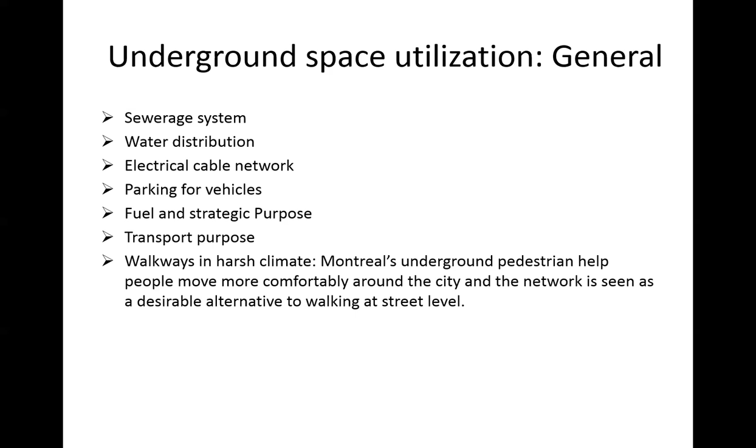There is also the developed countries, like Canada specifically, the Montreal underground pedestrian system where the climate is very harsh. So people also use this underground space for general walking purpose, like going from one street to another, because if we have the money, we can afford to utilize this underground space for walking purpose also.

These are just typical examples, like this is the sewerage. In Mumbai especially, we have a very strong network of sewerage because of the Arabian Sea, and here the depth of the sewerage goes more than 20-meter depth. All the channels are linked and very well maintained by the BMC, and I can say Mumbai is having the best networking system in terms of sewerage.

This is the water distribution system that is also being utilized underground. Once it will be running successfully, all this space will again be utilized as a surface for transport purpose, or any other development. Effectively this much space is utilized if you go underneath.

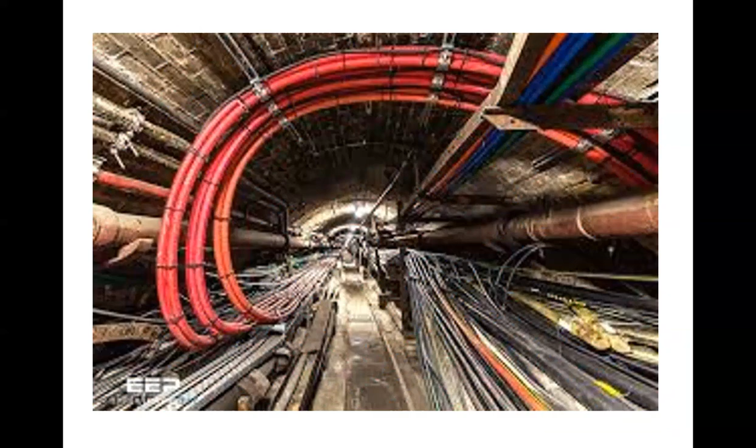This is the electrical distribution system underground. It's a very huge distribution system. I have also seen in Delhi while working on the domestic airport development, station development - there is a huge system of AC and all those underground cables that directly go to various terminals like T1A, T1C, T1D. This is a very huge network running all along the airport terminal and all along the roads covering it. So effectively, while doing this underground networking and cable arrangement, that much space is being effectively utilized as underground space.

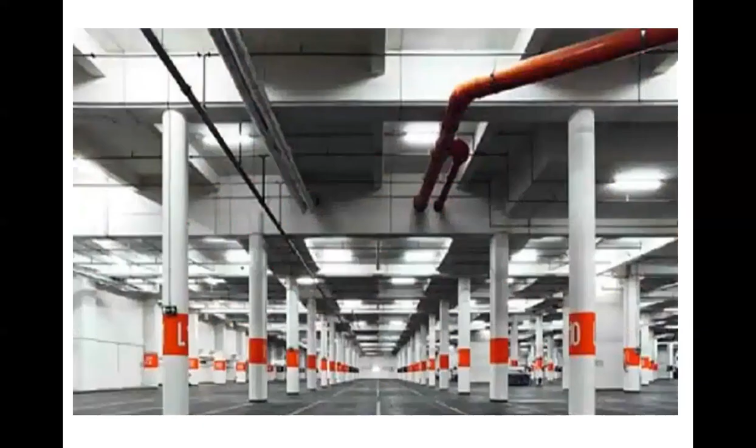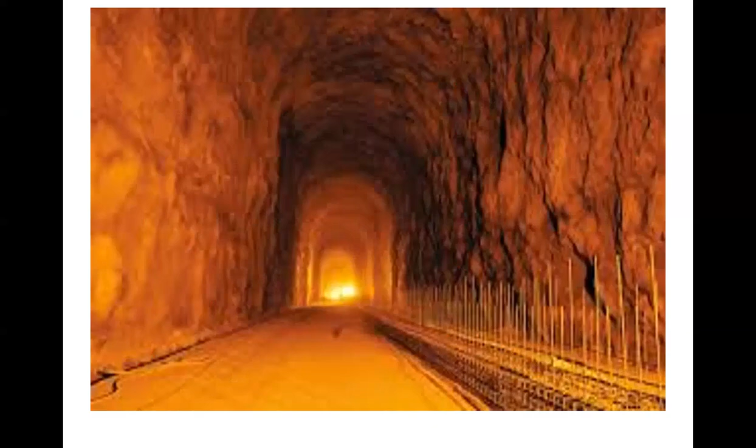Again, in Mumbai, we have a very good system of underground parking. It is there in Delhi also, in major metro cities, and especially in developed countries we have G+20, G+24 type underground parking space utilization available. As we know, in metro cities the number of four-wheelers is increasing like anything, so to overcome the problem of parking and space constraint at the surface level, we can utilize the underground space to develop parking, and effectively we can also manage traffic control. So this is again the utilization of underground space, like this fuel storage underground tunnel.

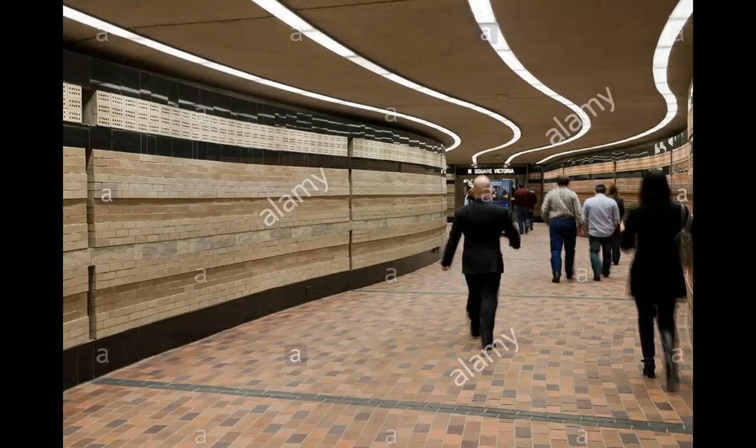This is the example I quoted - the Montreal street where people can walk in harsh climate, since it's mostly very harsh there. So people use this, and one study also found that there is a decrease in the crime rate when people go through this street, because it's enclosed and safety can be guaranteed. So that is also one aspect in a developed country where safety is a major concern.

Now back to our specific MRTS underground space utilization project. Why do we need MRTS project at all? We need our metro system because it will give us mobility, safety, and traffic congestion reduction. I think all of us know it's a very proud moment for Delhi Metro when we received the first green carbon credit system - our metro was the first in the world to receive the carbon credit.

This carbon credit involved an independent analysis by a UN agency. Generally they do the analysis, and through their study they can conclude how much vehicular traffic has been reduced due to the service of metro. So we became the first metro in the world to receive this carbon credit. Those who visited Delhi in the late 90s or early 2000s know what the traffic condition was there, and now we have easy connectivity all along Delhi because of metro.

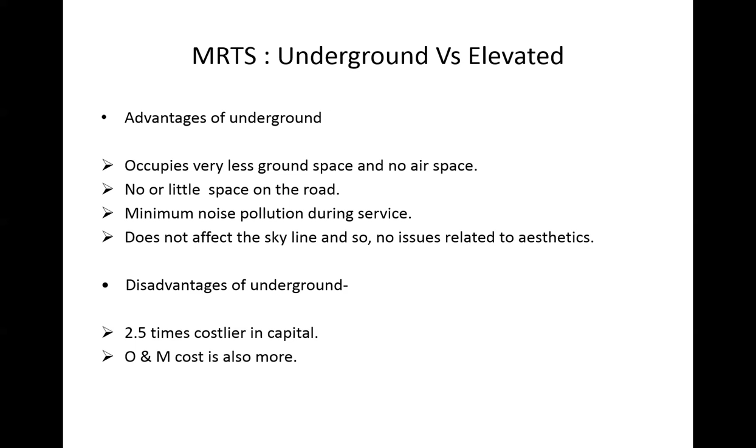The DPR is generally prepared with all stakeholders invited—meaning everyone who will be involved or affected by the project. Everyone is informed through newspapers, and a general consensus meeting is held, where the alignment finalized in the feasibility studies is further refined. There are some instances I want to share from my experience.

There are a few instances where a line or station that was earlier perceived to be elevated was, after this consensus process, converted into underground, and vice versa.

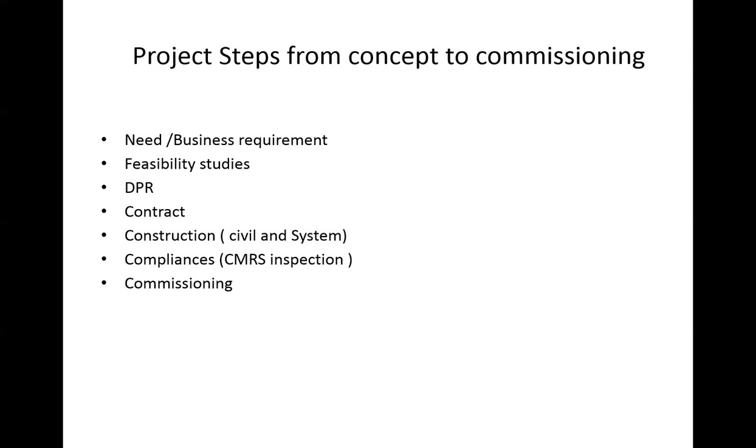So I have taken a bit of time to explain how the metro project covers, from concept to commissioning, what the steps are. Now this is specific to underground metro work.

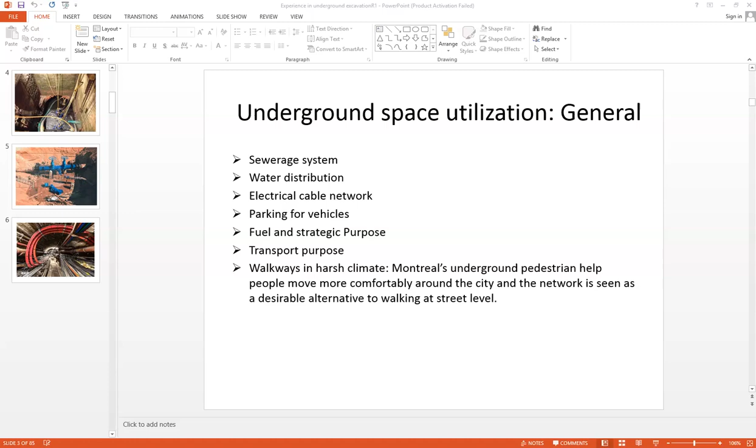Rehan, if I am going fast, please let me know. I will slow down my presentation if needed. It's fine, you are clear and very audible. Okay, if you want me to go slow, please remind me. So now we are at our main topic of today's session, underground metro work.

So again, when we go for construction, we have certain things to finalize, like our general arrangement drawing, the alignment drawing. This shows all our curves, all our elevations, the schedule of dimensions, like when our bogies and metros move, what clearances they have to fulfill, and what lateral and vertical clearances need to be finalized. This alignment finalization is done.

It's a very important part. We do this alignment finalization to minimize cost, minimize disturbance to the public, and maximize traffic count. Once the alignment is finalized, we are in a position to freeze our lines. All of us know there are various lines in Delhi Metro, line 1, line 2. So once the line and alignment are finalized, we can go for the next steps.

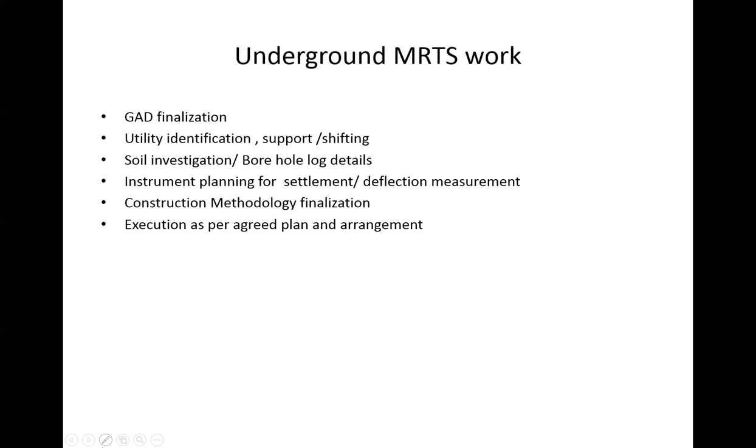Then once this methodology is finalized, execution will be done. So these are the steps. Now I will go in detail with individual steps.

It's a very rough sketch. Generally, the alignment is done in the AutoCAD drawing. Nowadays it's a BIM system. This is the area, you can see there is terminal 1, and these colorful lines are showing this alignment. So we have to see how to mark the alignment on the ground.

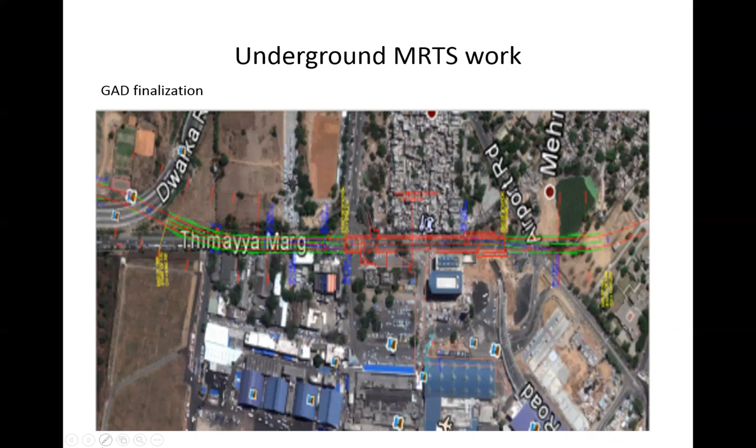This is a very preliminary drawing. We need to do a number of refinements on this drawing with the help of advanced technology, like we use the Bentley system to refine the curves and station location. The red color is showing the station location.

This is the area marked in yellow, that is the underground station. The IGI airport underground metro station is shown in yellow color, and you can see here this is T1C, T1D, T1A. This is the airport area, and all these are the offices and establishments which support the airport. I'm sharing my experience working with Delhi Metro, specific to that underground station in this domestic airport.

I have a combined utility drawing also, but that will not be properly readable here. So you can imagine if you can zoom it a bit - it is possible to zoom it further.

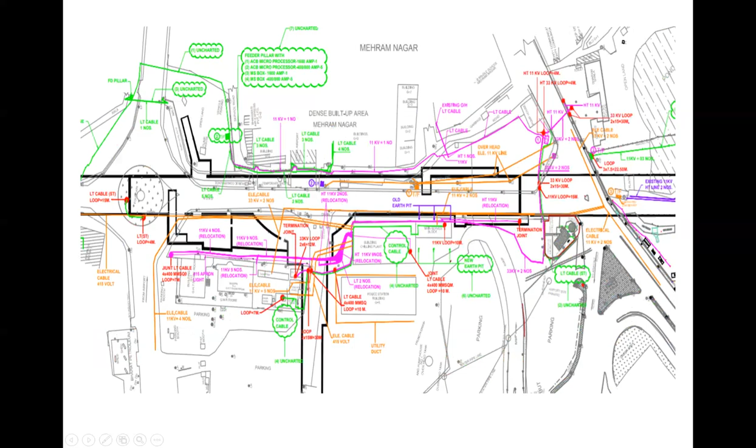This particular sheet, by control scroll - so you can see it, all these HT lines are there, LT cables, HT 11 kV, 33 kV. So along this network, cables are existing there, running somewhere along the upcoming stations and somewhere crossing the station.

As I have already told, we have to mark this on the ground, in collaboration with the DIAL team and the Airport Authority of India. We have also done the trenching, and as per specification we have laid all these cables, and we were able to save our construction zone with all this utility.

This is only the electrical cable that I am showing. Again, I am reminding, there are optical cables and a network of water pipelines also there. Okay, next please.

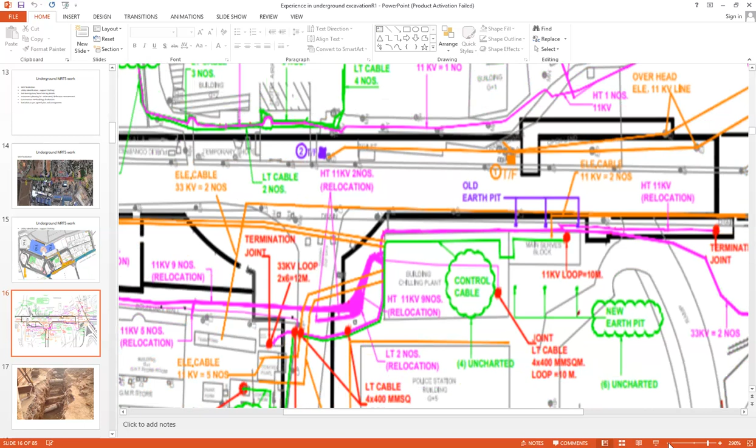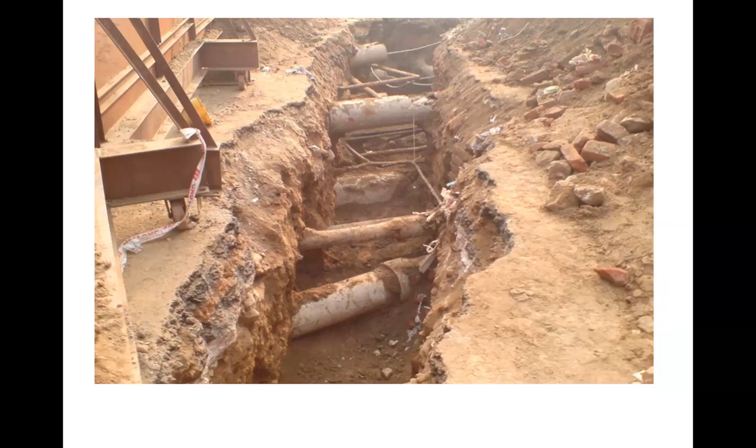This is the water pipelines, and this just highlights how difficult it is to work without shifting or without supporting these utilities. Okay, next please.

Next step, once we support or shift our utility, then generally it is presumed that by 2 to 2.5 meters we will get all the utilities. Generally we made our contract also like that, because the maximum depth a water pipeline can go is like 1.2 or 1.5 meters, but electrical, especially 33 kV cable, goes up to 2 meters.

But beyond that, we don't go in our preliminary stage, so we don't have much knowledge about the strata, because most of the area is filled up soil. So the top 1 meter or 1.5 meter, we can say, is not virgin soil or actual ground condition. So to further assess the geology or strata there, we go for soil investigation.

For that, there is some standard practice that we follow as per the IS codes. We go for the borehole, we calculate, we take the core samples, and after that we calculate their RQDs.

Once all this data comes to us, our design team will assess this data, and as per the RQD designation, the calculation and support structure, and the design of the slabs and walls will be done as per this data only.

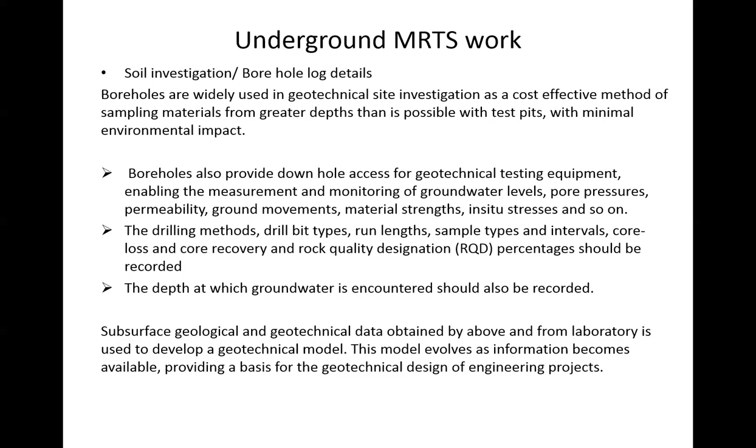So we take our time after the project starts, we do rigorous study and sample taking, and we appoint a third-party team also for conducting this test, so that we have actual data, and the result and design will be done as per that data. Okay, next please.

And at the time of construction, when we start, we must be sure of at least 90% of this data. The cost of this investigation, when we have 100% awareness, is approximately 3% of our civil Schedule A costs - when I say Schedule A, that means the station or tunneling cost. Okay, next please.

Once the construction will start, the design is finalized, and the drawing has come to us, then we will go for construction. Before the construction, as I have said, we will monitor the existing structure. We will do the background monitoring. Background monitoring is nothing but the monitoring before the actual construction starts. Then we will do the vigilance monitoring, during the construction period.

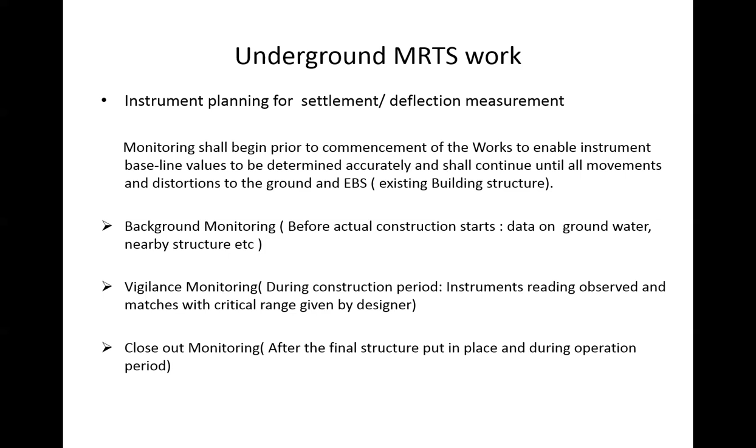And thereafter, this closeout monitoring - once we have finished the construction, then again, while the O&M operation is running, at least every 3 to 6 months, we need to again monitor those structures which were earlier sensitive.

This is like in the case of a tunnel. Generally, in Delhi Metro, we have a practice that we assume an active zone. Active zone means we do active monitoring around 50 meters from the tunnel axis, and for the vigilance zone, it is up to 100 meters from where the tunnel axis is going on.

Similarly, in case of stations, we again have this vigilance zone and active zone, as I briefed earlier. The distance is not a standard, it's nowhere written. It's our general practice from Phase 1 that we follow - up to 50 meters we do active instrumentation, and up to 100 meters we are vigilant, checking it, but the frequency is less.

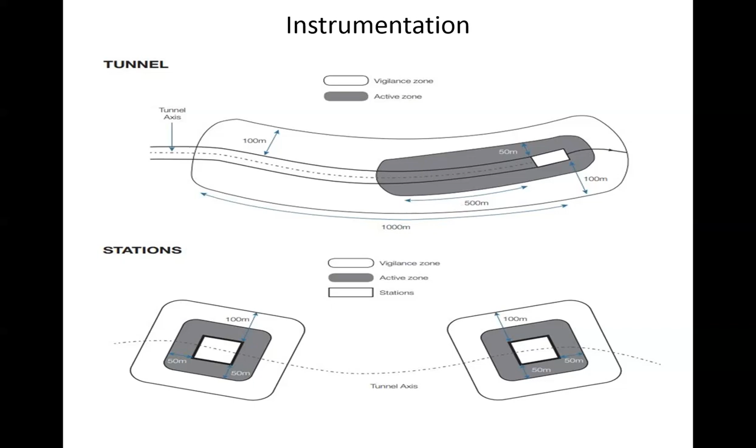These are some of the ways by which we can monitor our excavation. We have our tilt meter, we have our BSP - BSP means a building settlement point, road settlement point. We install these, and as per the frequency, we take the readings and compare with the threshold value.

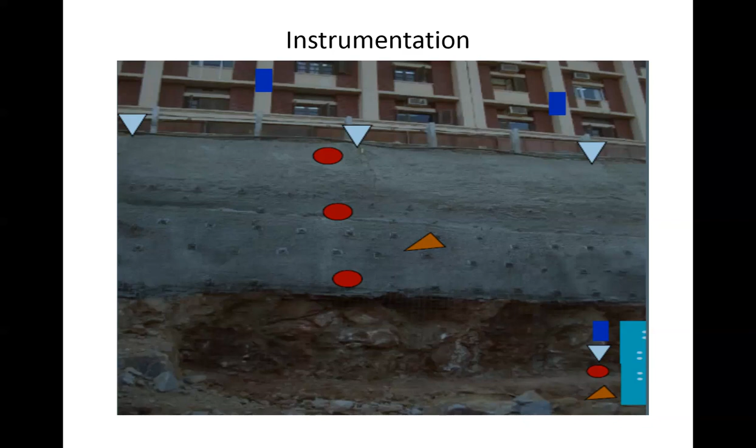These readings are important. Why is it important? You can see here - this is an existing building where there is already a crack. So we have installed a crack meter here, and we have taken the base reading. Before actual starting of the construction, this activity has to be done to take the base reading.

We also prepare a building survey. We also do the building survey, and whatever defects or cracks are available, we take the pictures along with the owner of the house, and we sign and also take the countersign so that it will be a proper record, and it will serve as a base reading while we are going for construction. So it will be very useful at a later stage.

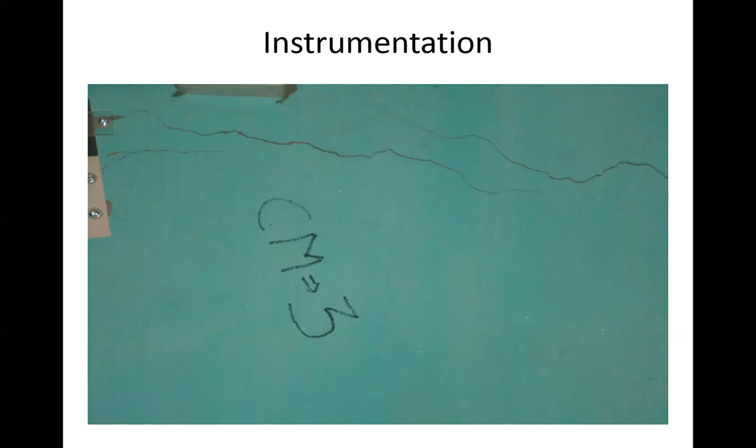Now, all this initial reading, once we are done with, we finalize how to proceed. Even in construction, we have a number of methodologies available with us, like cut and cover, drill and blast - drill and blast is one of the oldest techniques for tunneling - tunnel boring machine, NATM, it's very famous.

In fact, NATM is also being used in the Delhi Metro, especially for crossovers, like passing from one cross passage to another tunnel. While making the way between these two tunnels, generally this will be made at approximately 244 meter intervals. It is a guideline, so there we use the NATM method.

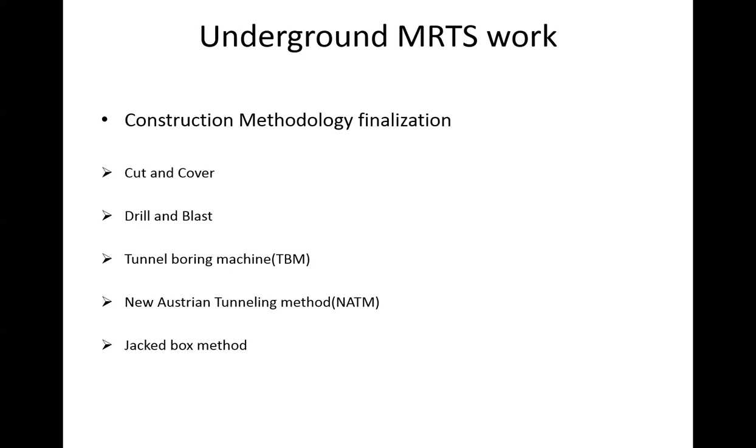And this box - jacked box - it is also called box pushing method. So these are the methods that are generally used in Delhi Metro. There are some other methods also, but these are the ones being used in Delhi Metro.

Now, to decide and finalize which system we are going to choose, there are some general criteria - like if we have hard rock, then we will go with shield tunneling, and if it is soil, then we will go with the cut and cover method. It also depends upon the cross section and the continuity of the tunnel.

Like if you have only a 100 meter or 200 meter tunnel, we will not go with TBM, because it will be very uneconomical - since to lower the TBM we have to make a shaft, and to take out the TBM we have to again make a shaft.

One is called launching shaft, from where TBM is launched, and from where it is taken out, that is called retrieving shaft. So preparation of shaft is itself a huge task that is highly cost intensive and labor intensive. So the choice depends upon the continuity and the cross section, and also if we have a curved tunnel, then TBM machine is not so useful there.

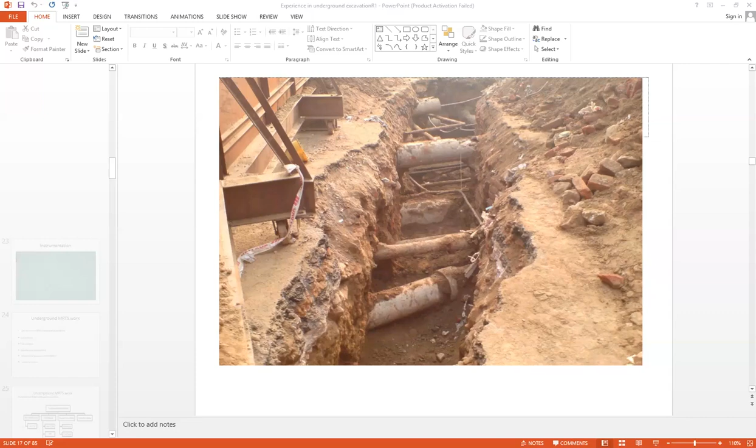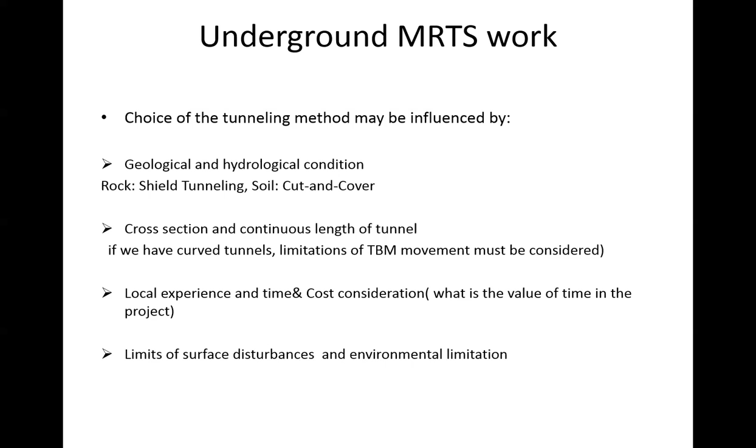It also depends upon the cost consideration and how much time is available. If we don't have much time, then we can go for the TBM because it gives us fast results, but there will be cost involved. And of course, there's the limit of surface disturbance and environmental limitation - with cut and cover we have a lot of surface disturbance, but with TBM we can easily pass beneath the ground, and nobody will even be aware that the tunnel is going on. So it also depends upon how much disturbance is allowed in that area.

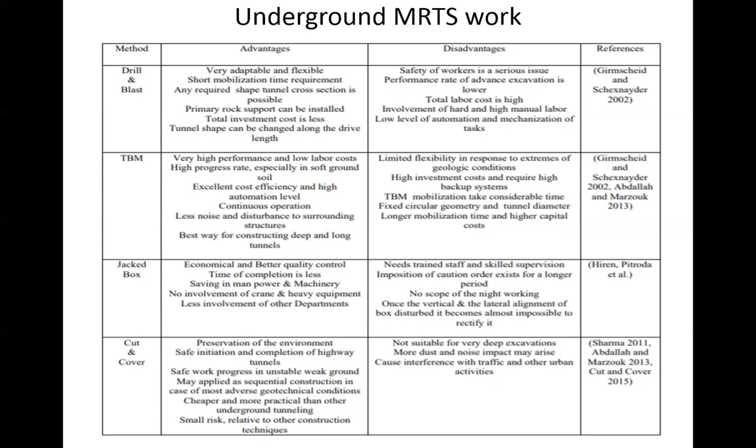Okay, next please. This table is for reference purpose, it gives us some advantages and disadvantages of different methods - drill and blast, TBM. I have already briefed where we will go for cut and cover and where we will go for TBM. So this is just for reference. There are always some advantages and some disadvantages with specific methods.

Now let's confine ourselves only to the cut and cover method, because TBM is going to be presented tomorrow. So I will restrict myself to the cut and cover method only.

Again, in cut and cover, there are 3 or 4 methods available with us, like the D-wall method, also called diaphragm wall. There is also secant piles and sheet piles - soldier piles also used in tandem with horizontal planks, also called wooden battens.

In detail we will study in the next lectures where this D-wall will be used and where these piles are used. Basically D-wall is used when we don't have any problem with groundwater, and up to about 20 to 25 meters depth we can go with D-walls.

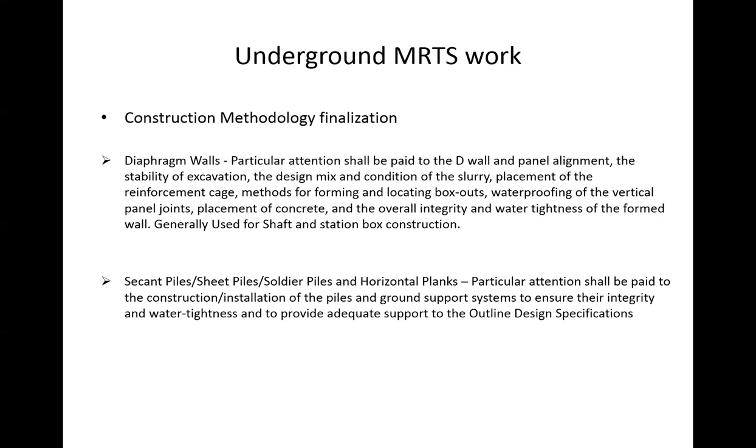With D-walls we have minimal traffic disturbance and minimum surface area disturbance. With sheet piles and secant piles, also known as the bottom-up method, we will have maximum surface disturbance, and its use is restricted as compared to D-wall.

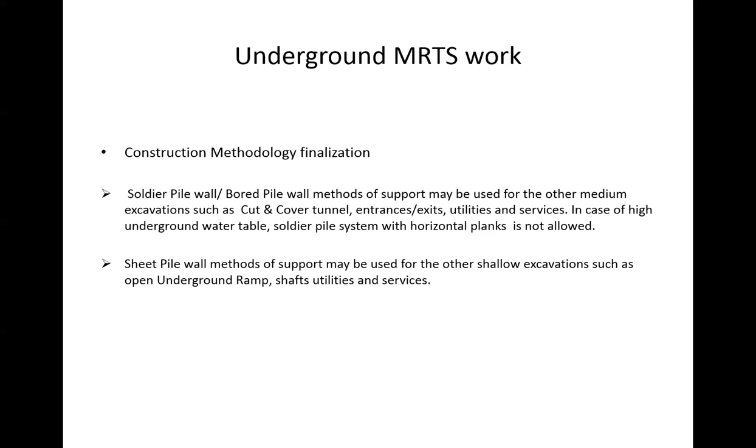Sheet piles are specifically used in the case of ramps. What is a ramp in a metro MRTS project? If you have visited an underground metro station, when we come from underground to the elevated section, there will be a ramp. So in the ramp area, 90% of the excavation we will do with the help of the sheet piling method.

What we do is put up these piles, or sheet piles, in association with planks as per the design data all along the station box or cut and cover box, and then we start excavation of the strata, and we go up to the desired level, up to the level where our track is going to come, where the metro structure is going to come - the lowest metro structure, platform level or track level, you can say. But in top-down, what is happening?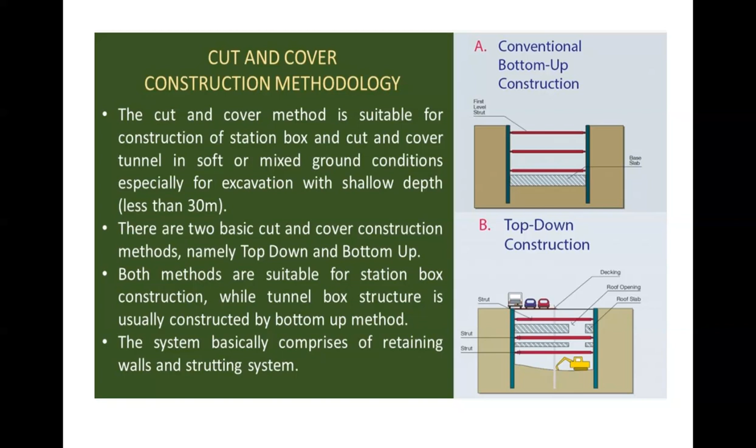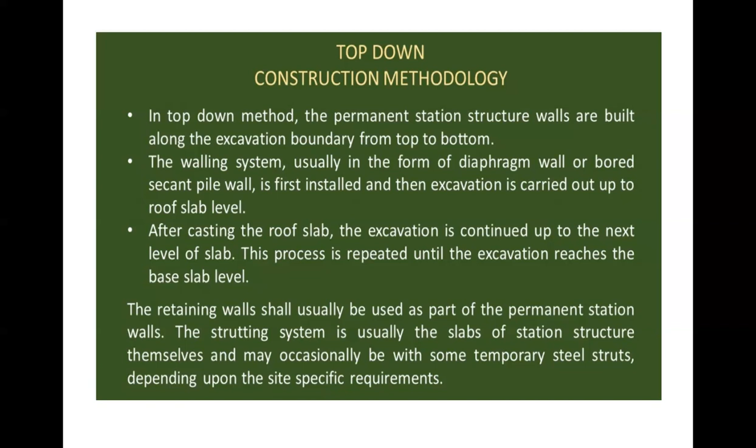Okay, next please. This methodology I have already explained - it's like a retaining wall. Okay, next please.

So these are the steps of top-down construction methodology that I just explained. In step 1, we put up the retaining wall in terms of either diaphragm wall or soldier piles. The purpose is to retain the wall, and in case of D-wall, it will also serve as the station wall. The concrete grade used will be the same as the design wall concrete, giving the same strength, so we can utilize it as a station wall with proper jointing treatment.

Once we install the retaining wall, in step 2 we can do the top roof up to the roof slab. We do the excavation and put a strut there, and from this there is a cutout. In step 3, you can see one cutout below the strut, from which we can lower our equipment and start construction activity while traffic movement can be restored. As you can see in figure 3, traffic movement has been restored - not exactly to its original location, but it gives some relief to the common public.

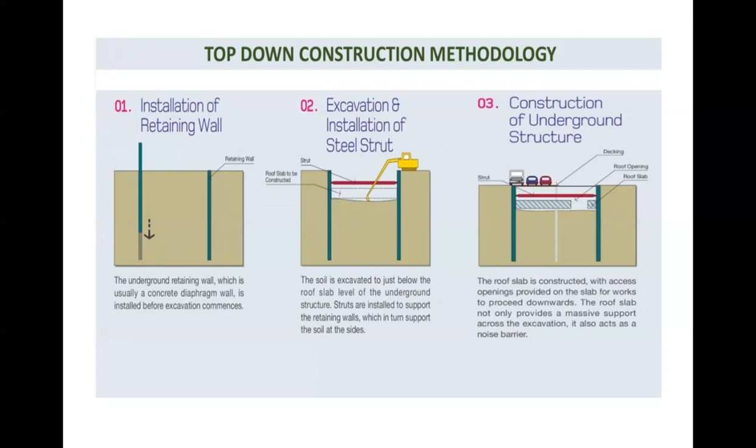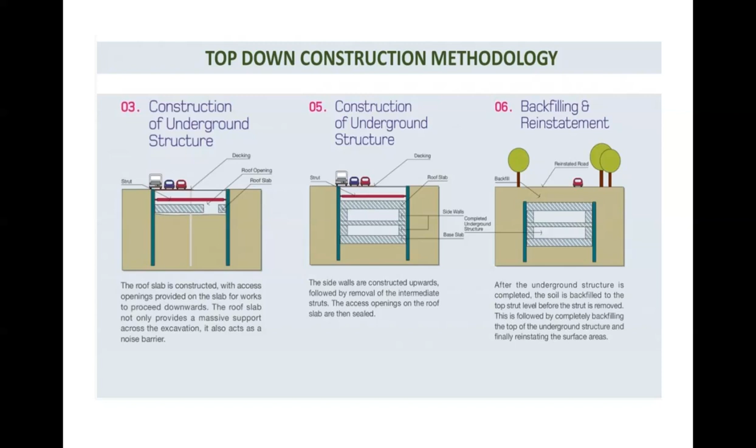Next. As we can see from step 5, we are going inside, and this white hatch mark shows the slabs we are also constructing, through the help of the shafts or cutout. Once all the lower slabs have been cast, we come up - whatever shaft or cutout is left in the concourse slab (the second middle slab) will again be filled, and the roof slab will be filled. In step 6, construction will be complete and restored to its original position. So this is the methodology used in top-down, from step 1 to step 6. Okay, next please.

Now in bottom-up construction methodology, as I already told, it is the same as putting up the retaining wall in terms of soldier piles, and these soldier piles and D-walls will be designed with respect to the earth pressure there. As we have collected data up to this stage, our designer, with the help of investigation data, comes up with the design of the soldier piles - their section, size, depth - and accordingly we fabricate those soldier piles and install them at the site.

So in bottom-up, once we put this up, thereafter we start construction all along the prescribed area, and here we have certain limitations. In top-down method, we are able to restore traffic at least up to 1 or 2 lanes while constructing the roof slab, but here it is not possible because it is all excavated along the length. Okay, next.

Though sometimes, once or twice, we have provided a steel deck, but that was a very costly arrangement, and it's only done once we reach at least 50% or 60% of the desired depth - then we can provide the steel decking system. So these are the steps of the bottom-up construction methodology, similar to, just opposite of, what we did in the top-down method.

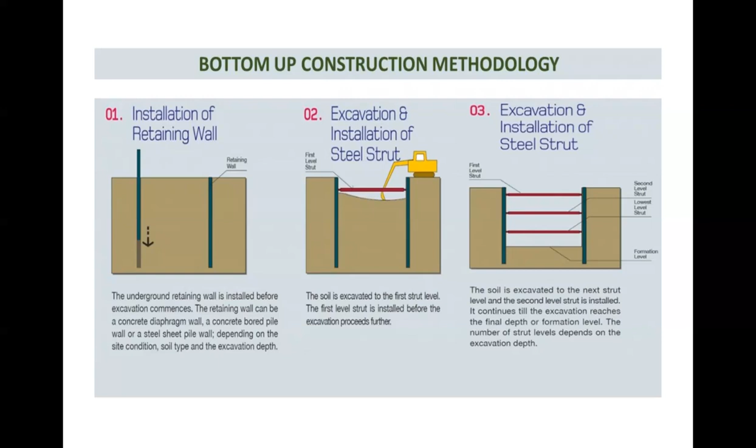Here again, we use the strutting system, waler beam, along with the struts extensively, and all these walers will be supported by soil anchors. Since the depth is more than 17 to 18 meters, and the strata, somewhere we also found fractured rock that we will see in the pictures. There we also do some treatment to the rock surface or fracture zone.

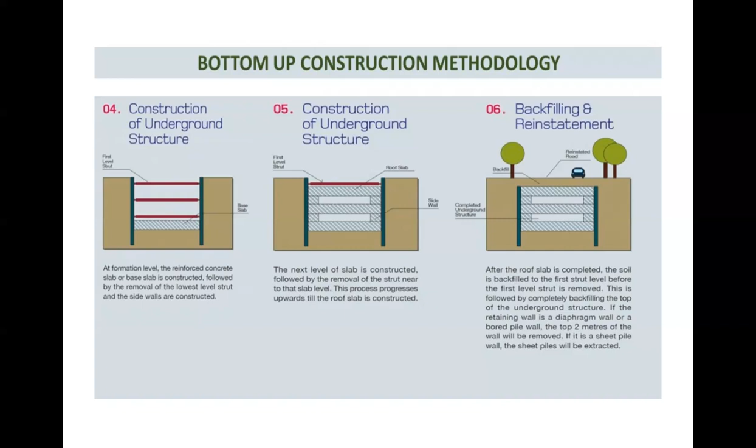We can see from steps 4, 5, 6 that we have reached the formation level, meaning the desired level up to which we want to go. There we have cast the slab called the base slab. Thereafter we will erect all the columns, all those undercroft slabs, then come up to the concourse slab. Then we will cast the roof slab, and it will be restored to its original position. Then we will backfill and reinstate the position to nearly the original condition.

So we have gone through the top-down method and also the bottom-up method. There are some comparisons, like which method to use and what are their impacts.

In terms of labor intensity, top-down is a bit more skilled work. Why? Because there are lots of panels coming in this concrete slab. We will see this cage, how it will be lowered and how the joint will be formed. There we have to ensure the joint is perfect, there will be no water leakage. Because, as I have already told, this D wall will act as the permanent wall of the station area, underground station area, or the structure that we are making, so there should not be any leakage.

And we know that nowadays the coupler is being used extensively. So while putting this cage, we also need to ensure the coupler positioning is perfect and the coupler is not damaged. Why? Because while we put the bar to the coupler when doing the roof slab or concourse slab, it needs to match exactly. So as compared to the bottom-up method, it's skilled work.

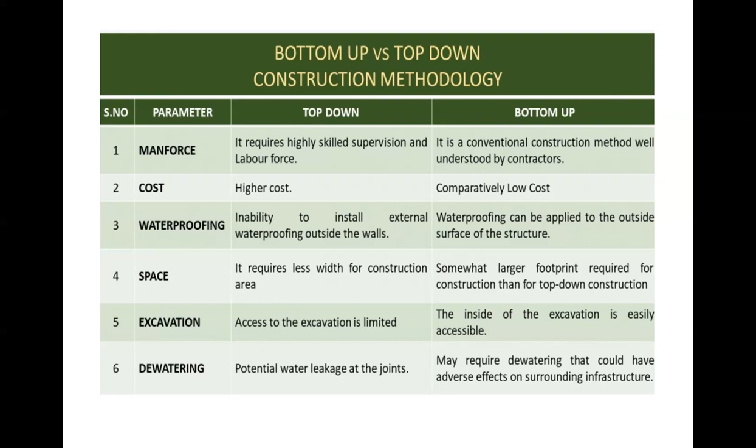Again, for dewatering, there is always a chance of water leakage in the case of top-down, and in the case of bottom-up, it can always be controlled.

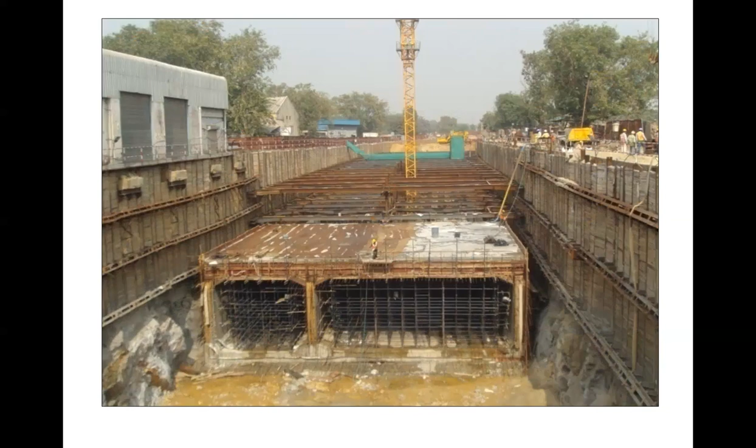Yes, we can see here, we have utilized all these shoring systems, there are soldier piles, and this is an example of the bottom-up method. You can see easily the walls are separate. Here we can treat all these joints and walls with the waterproofing material. So this is an example of the bottom-up method.

Here also, this is the example of bottom up method.

This is the entry exit structure, and here we have again utilized the bottom up method. We use these soldier piles along with this wooden plank, and a waler beam is there. In the waler beam there are soil anchors, which are there to stabilize this waler beam against the earth pressure.

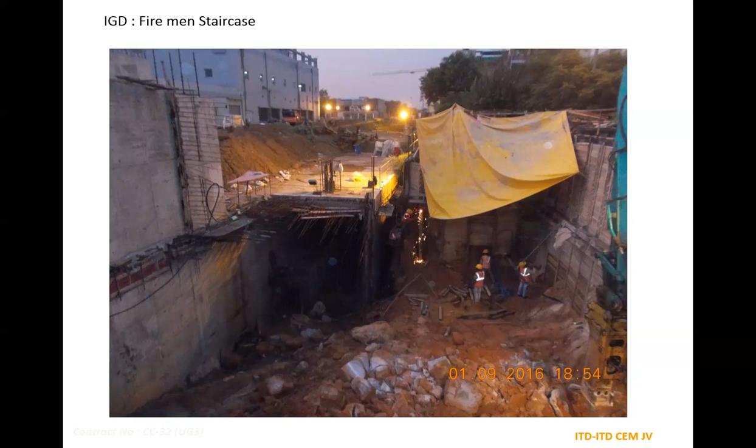Typical example of bottom up method. It's a fireman staircase used for emergency evacuation purpose.

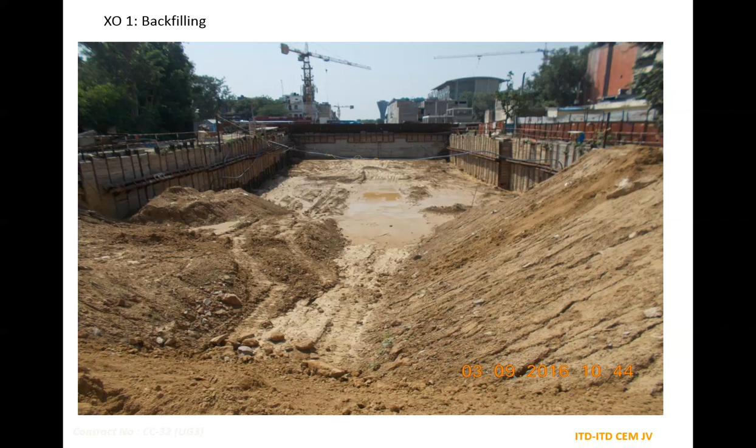Yes, backfilling. Once our roof has been constructed, around 2.5 to 3 meter depth we need to backfill. While doing the backfilling, we need to go for some investigation. The soil used for backfilling is tested - we calculate its density and moisture content, and we specify that not more than a 300 mm layer can be placed. While backfilling this roof, we backfill layer wise, each layer being 300 mm, properly compacted, and there will be tests - we do the sand replacement method test and others to calculate the density there.

This is the launching shaft. You can see there are two shafts, which can be used for lowering the tunnel boring machine. The walls are concrete walls, so this is an example of top-down method, which will be utilized as the outer wall of a structure.

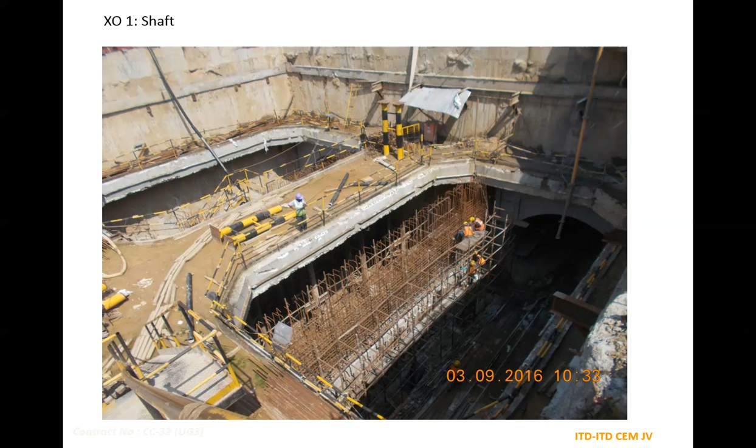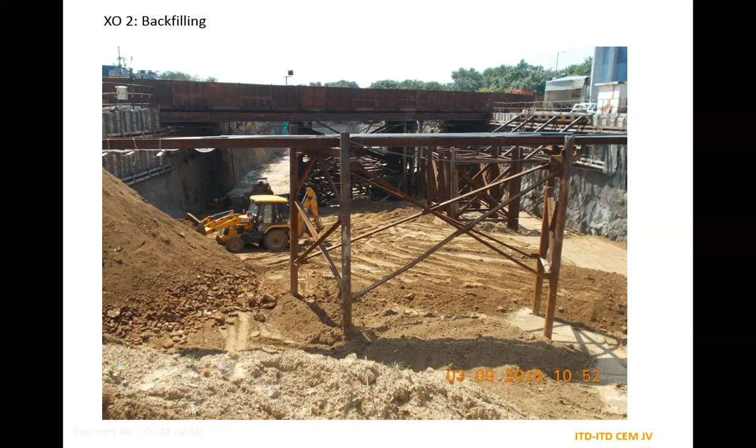This is the bridge that you are seeing, which can also be used as a decking. In the domestic airport, we have provided this decking for the movement of traffic. The depth achieved is nearly 50%, and we have provided cross bracing and waler system throughout.

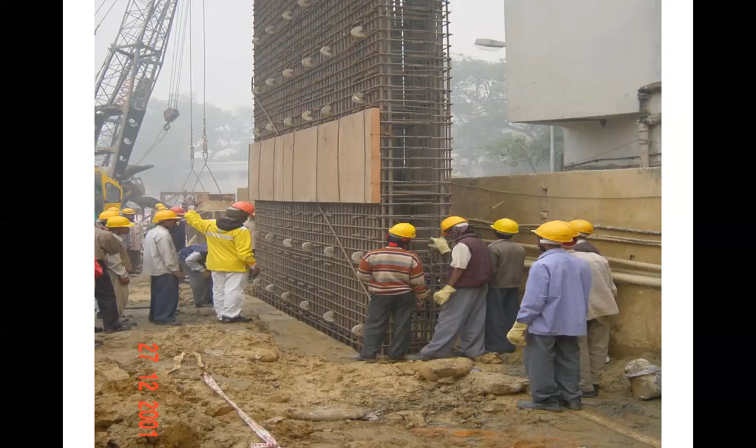This is when we do the piling - this is one of the rig machines.

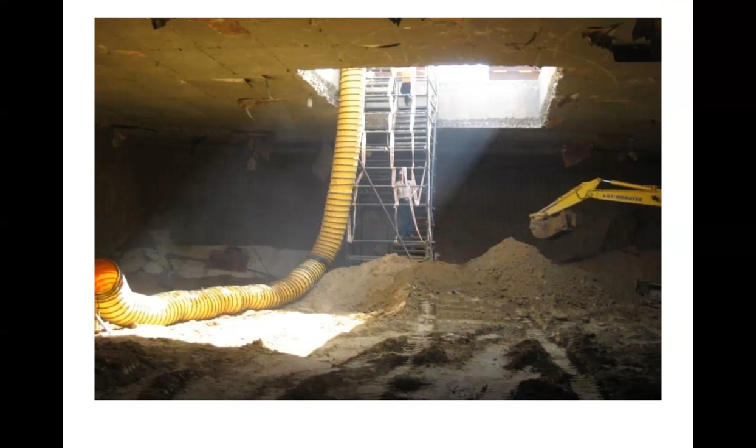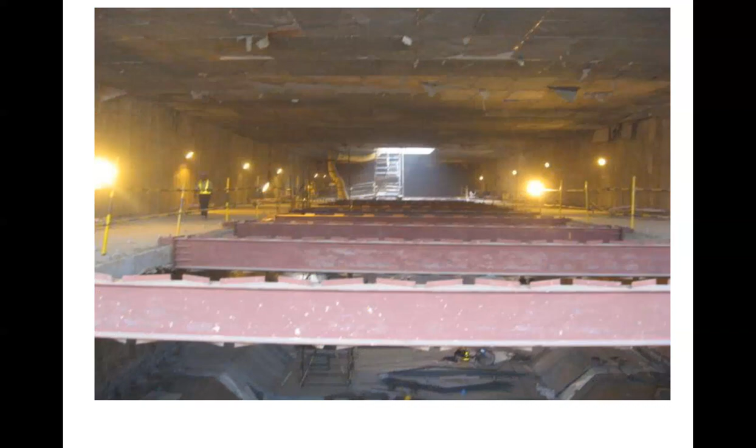This is the cutout at the roof, and you can see how the ventilation is provided here, with hardly a single machine working. Top down is a bit slow because the access is very limited - whatever excavation is done is by only one or two machines, and gradually it goes down.

This is the second level of the top down method - I can say this is the concourse level. You can see there are walers at the concourse level, and below that excavation has also been done, with one cutout at the roof level. This is an example of top down method.

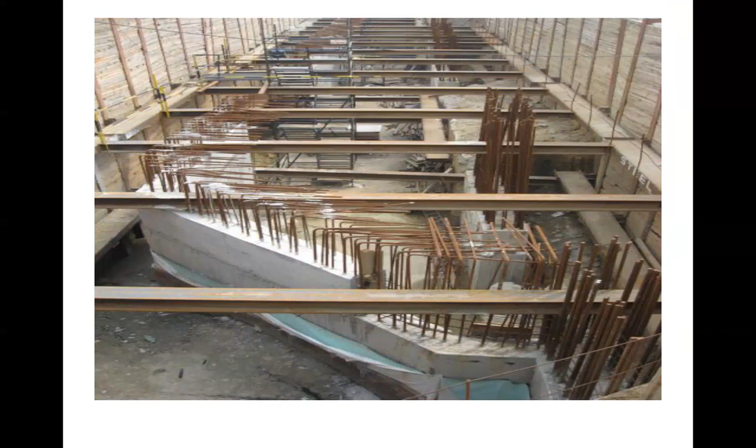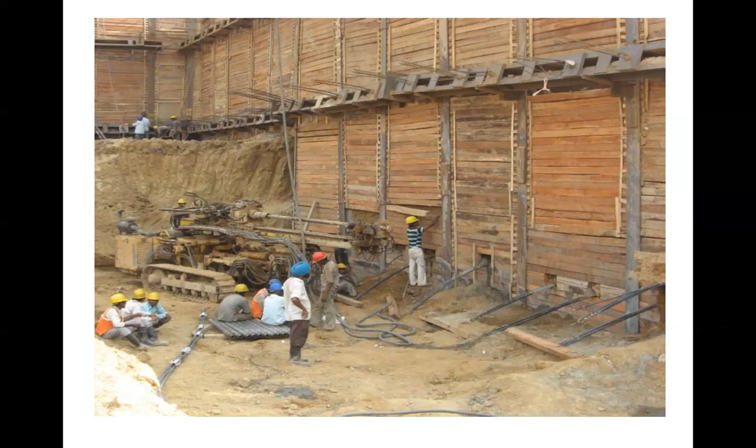This is a typical example of bottom up method, where we have all along the soldier pile and waler beam as well as strut.

This is again an example of bottom up method, where you can see this wooden plank being fixed in between the soldier piles.

This is again bottom up method with the help of a strut.

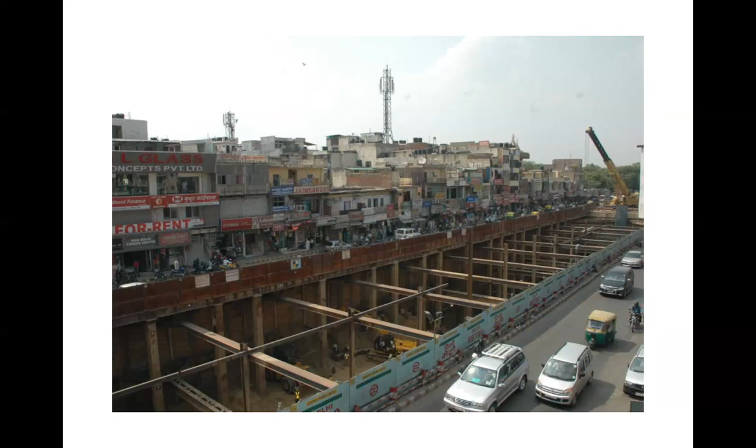Typical example of bottom up method.

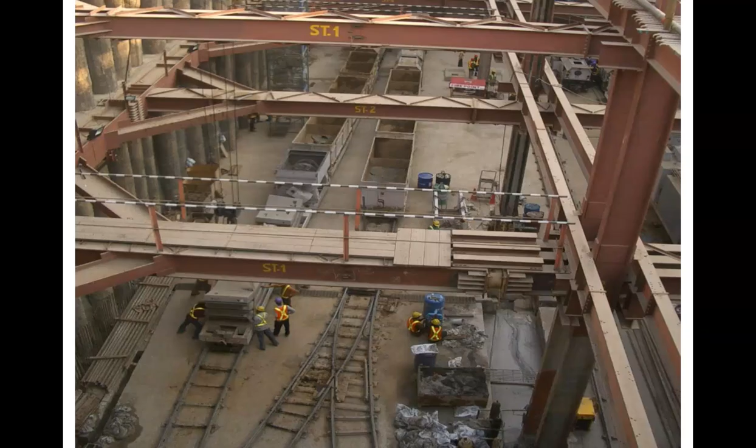This is the launching shaft. You can see these trolleys are there to collect the muck from the tunnel boring machines.

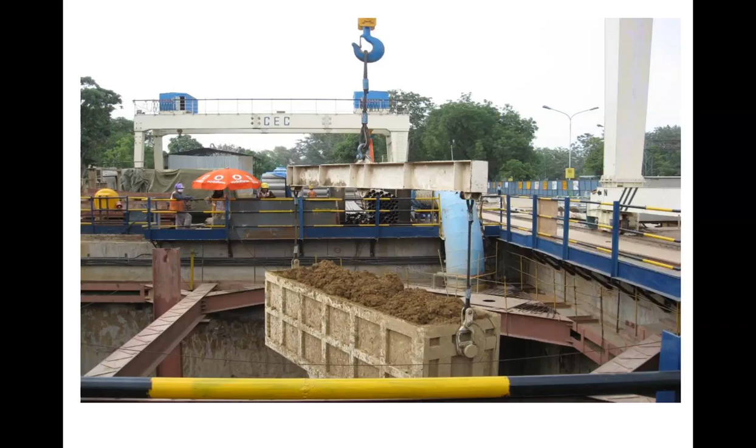Especially in Delhi, in Dhaula Kuan area side, especially this airport side, we got the rocks, and the rock is somewhat more or less very strong, but it's not continuous. Somewhere we get weathered rock, or somewhere we have joints, so we need to stabilize this rock while doing excavation. So the method that we have employed—these are the standard methods of shotcreting and rock bolting.

For shotcreting, generally we do the shotcrete to stabilize the slope. The rock surface that is exposed to the weather, where there are joints, we don't have much confidence on that. To stabilize it for our working, we opt for the shotcreting.

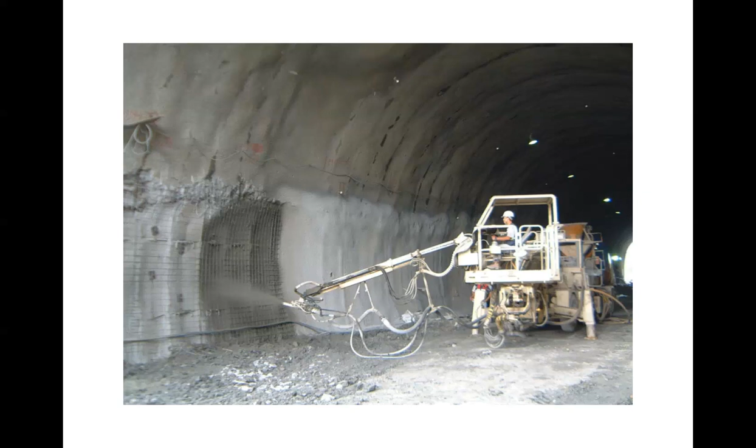We have two methods of shotcrete available with us: dry mix process shotcrete, and wet mix process. The difference is the dry mix process shotcrete doesn't use already mixed concrete or mortar. In fact, while shooting, I request please show some photographs below these two slides, then it will be easier.

We can see shotcreting. It's like a nozzle, and it's mainly controlled by the operator, and it can be dry or wet. If it is dry, then the strength achieved will be much faster. While it is wet, it will take some time to gain strength, so we need to wait for further excavation before it stabilizes and has sufficient strength.

So in our project, we mostly used the dry shotcrete. But the disadvantage of dry shotcrete is that it has more rebound and more wastage. When I say more rebound and more wastage, that means while putting the shotcrete on the exposed surface, it will come out, it will not stick.

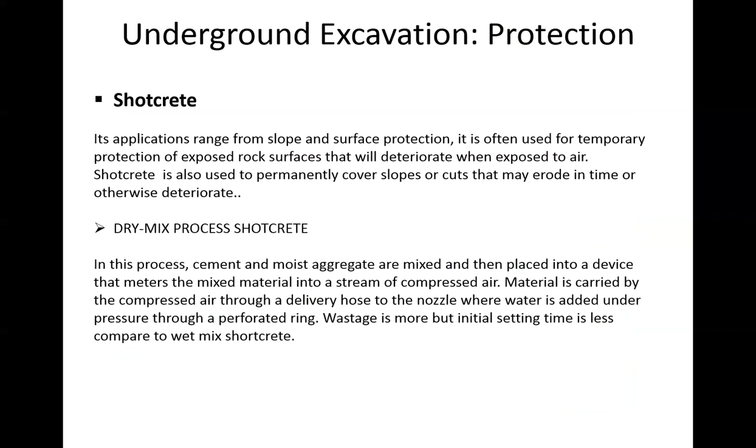Okay, please move up there. Yeah, thank you. Next, please.

Wet mix, we have seen it—there is generally less rebound, less waste, but the time, like always, we have a limited time. So even though it's costly, we generally use the dry shotcrete only. We also use this shotcrete not in isolation—shotcrete is being used along with the rock bolting.

Rock boltings, as we have already seen in the walers, there are soil anchors. Soil anchors are provided to stabilize our waler, and once drilled and put up with proper grouting as specified in the specification, it will be stressed to the desired level to attain the requisite strength to resist the required earth pressure.

In a similar way, rock bolt we use while we get the rock surface. This rock bolt—generally where we find the jointed or fractured rock surface, there we install the rock bolting, and they work as a reinforcing element.

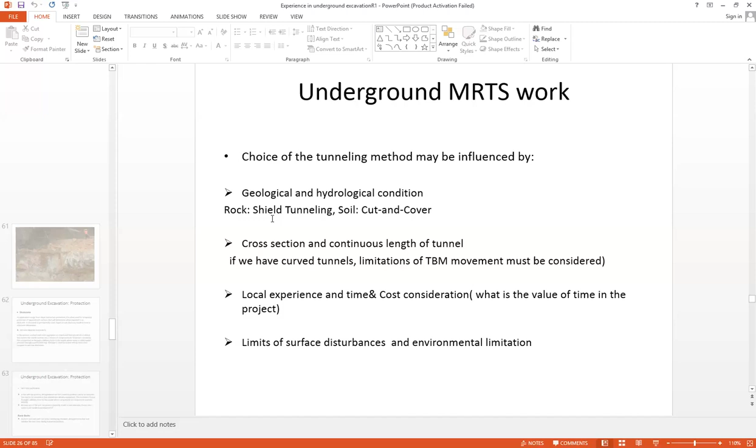In case of when there is a movement in the rock, this bolt, when there is a tendency to move, will develop a restraining force that is transferred back to the rock mass. That means it will act as a restraining force against the force that is being generated due to the movement of the rocks. So the function of the rock bolt is to restrain those movements.

And generally it is being used extensively in all the projects, especially in hydro projects and highways and expressways being built near mountainous areas. We have used this extensively.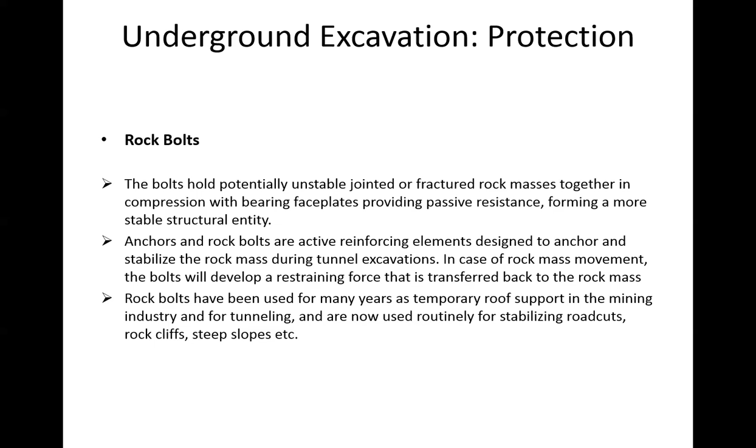Once the desired level of the rock bolt is decided, the anchoring length is decided by the designer, along with the grouting, and after putting the rock bolt, we also stress it to the desired level so that it will restrain the requisite amount of force.

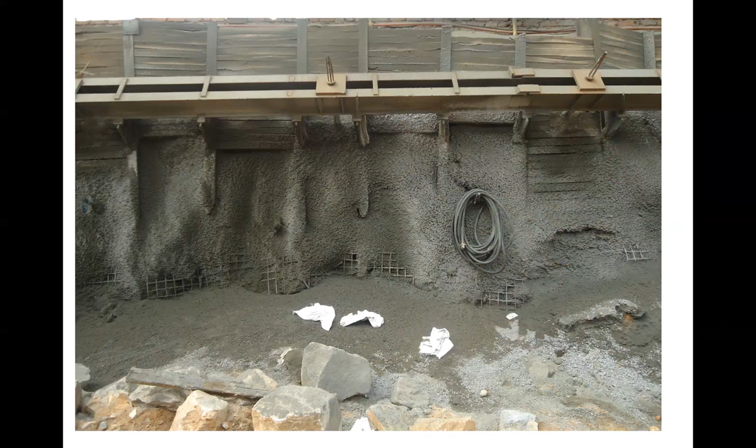So these are examples of the shotcrete. While doing the shotcrete, we need to ensure that the wall angle and the nozzle angle must be at right angle to give maximum efficiency and minimum wastage.

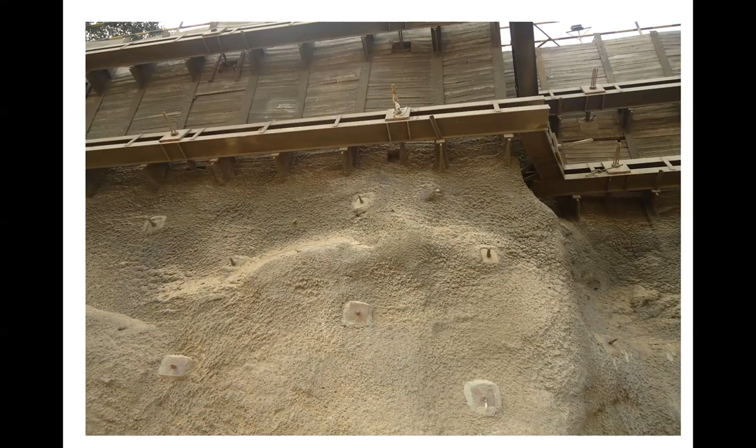These are examples of the shotcrete, and shotcrete is all done—I have just forgotten to mention that it's along with the wire mesh. Generally, shotcrete will be done in 2 or 3 layers as per the specification, and it will be done along with the wire meshing.

These are examples of the shotcrete along with the rock bolt, and in the waler beam, as I said earlier, you can see these soil anchors that have been cut after the stressing. The numbers are there, and this rock bolt is there along with the rock bolt plate and the shotcrete.

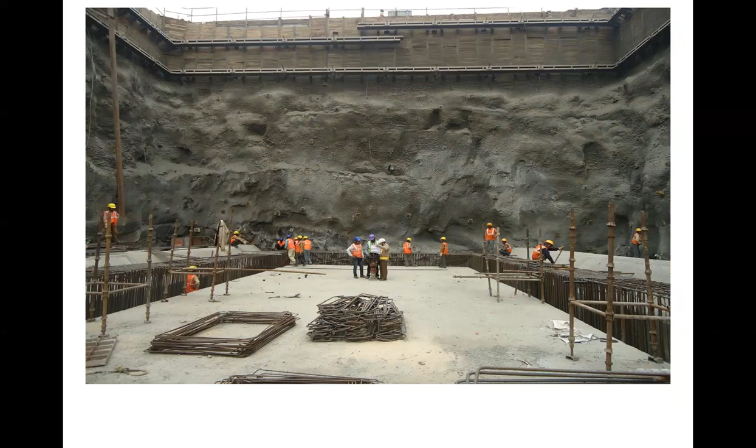This is a typical example of shotcreting and rock bolt along with this soil anchor.

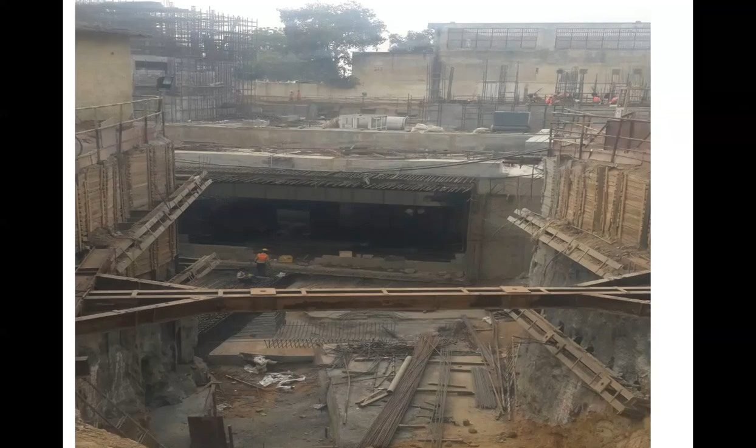This is the bottom-up method. What you are seeing here is the base slab. The base slab has been cast, the beam is being cast, and all along here we have found very hard rock somewhere, and a drastic change in the soil or rock condition. Here it's very hard rock, and just after 50 meters we have got the weathered rock.

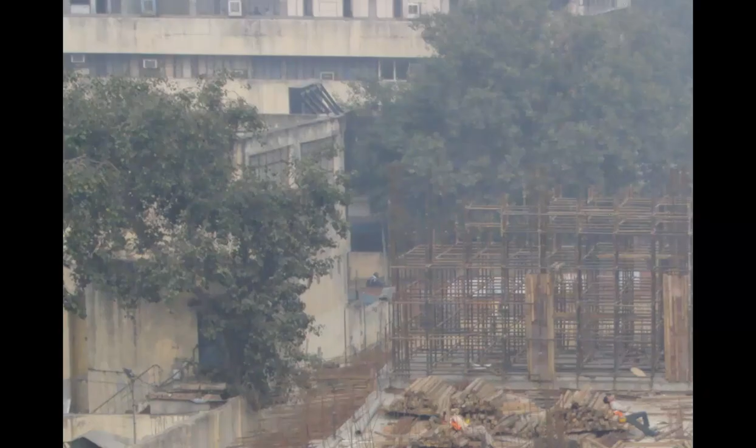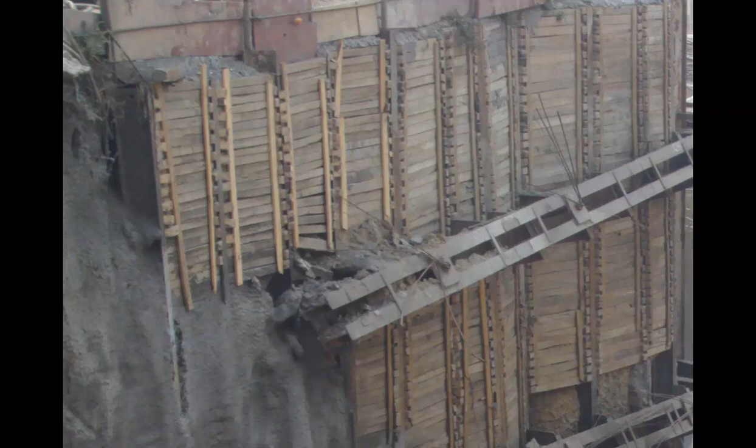Again, this is the soil anchors that is being shown.

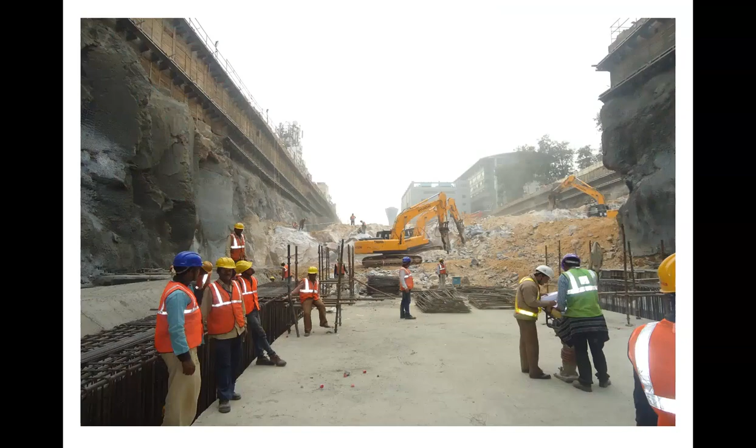This is the entry exit of the structures.

Here we can see these 3 machines are working together, but for safety purposes we ensure that it must not be in the influencing zone of other machines while doing the excavation. These are the rock breakers. The rock here is very hard, so we need to employ very hard rock breakers and a number of them.

In this picture you can see what I said earlier about the advantage of the bottom-up method. We can see 1, 2, 3, 4, 5, 6, 7 - 7 or 8 machines are working all along the station area. That is one of the advantages of using the bottom-up method.

This is the view from the top of the base slab. You can see by the color of this rock that it is highly weathered. We may be able to see this in the next figure.

So just 2 or 3 slides I have put up, the last slides. These are the slides that you have seen of the construction work. This is the result of our hard work. Now it has been converted into the station.

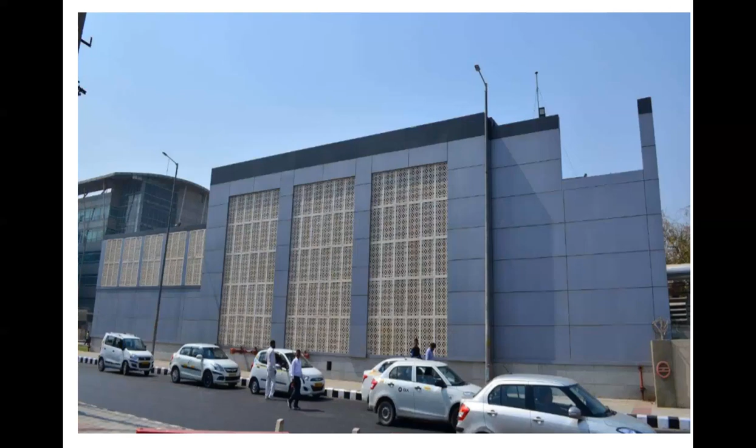This is the view from the subway, from the airport side. This is only one structure coming up in this underground metro station, and this is to support the air conditioning system in the station.

This is basically called - all the chiller and all those things are available here. This is the ancillary building, and it also holds the water supply and fire water. In case of any fire, all this water is available here for fire extinguishing purposes.

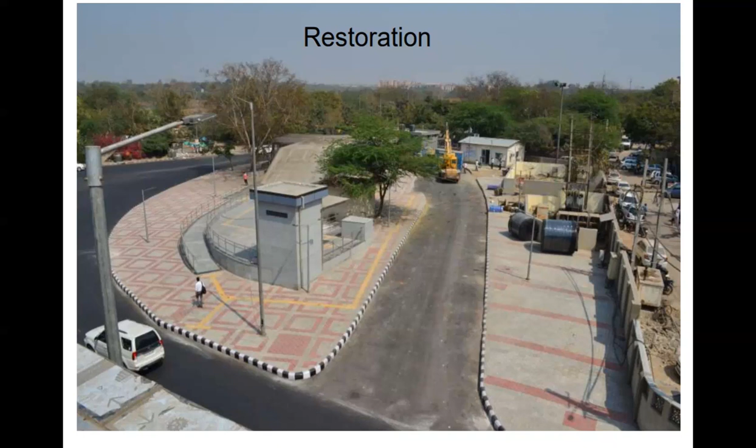This is the structure, the entry exit that we have seen in the diagram. Now, after the restoration, this is the station entry exit.

This is the same box that we have seen earlier. Now it has been restored, and all the work that you saw earlier in the pictures is completely restored and open to the public, and the traffic at the ground level has also been restored. There is hardly any trace that we have done a lot of work here.

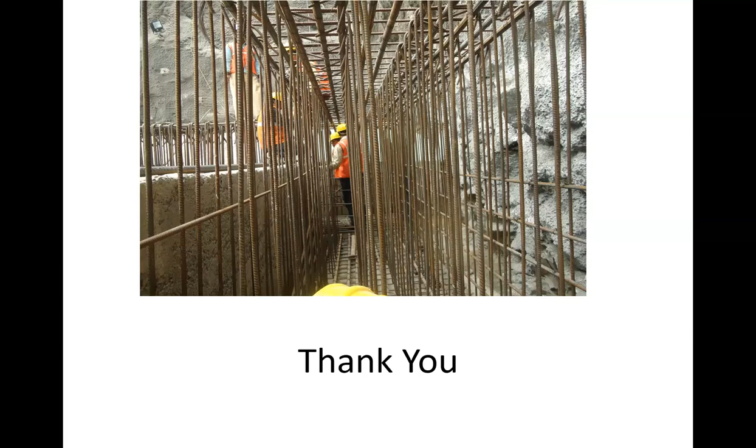Yeah, thank you. I think I have covered it. Thank you.

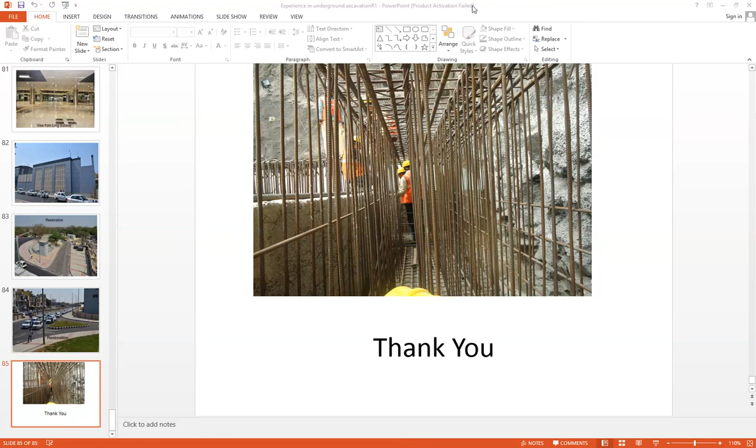Shehzad Sahab, I want to congratulate you for a very good lecture, informative also, and I hope next time you will come, inshallah, to Aligarh for another better service to be started soon. I will be thankful, sir. I pray that something happens so that I come to Aligarh. Up to that time, I think you will be at the highest position, maybe, inshallah. Inshallah, we hope so.